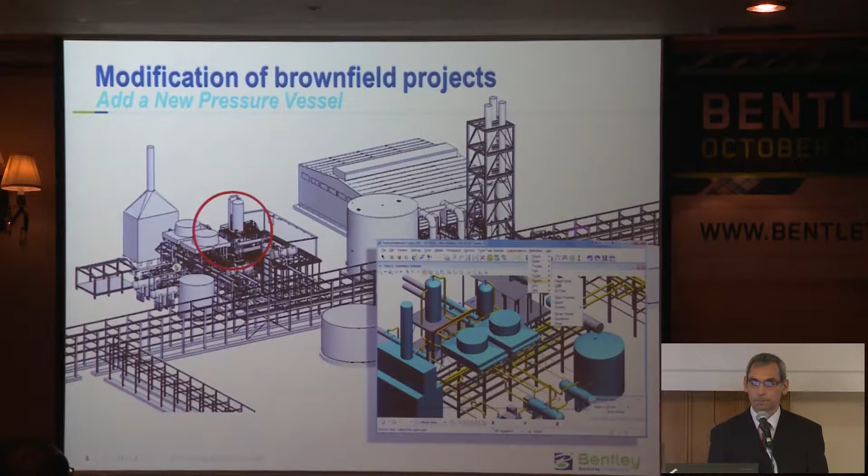So we're going to be considering this as a campus, a site that has many aspects.

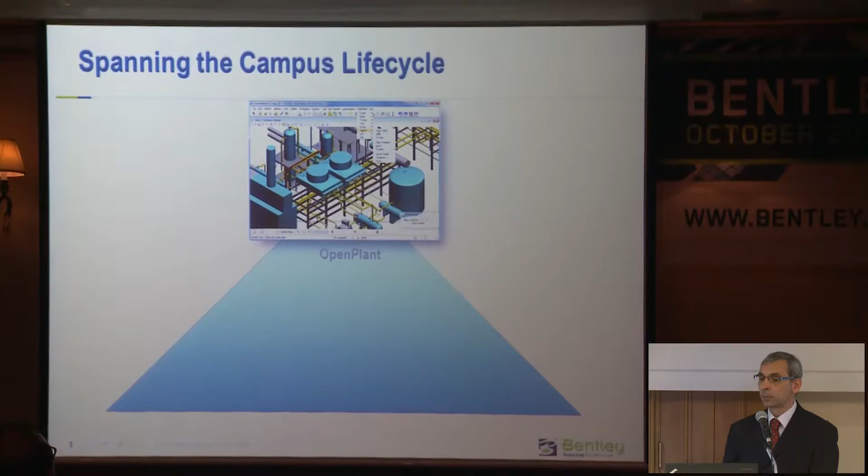So how do we do this today? Well, we look at this in stages. We can look at facility programming or planning the process. We look at the design, the analytics and the construction stages, and finally the operation stage.

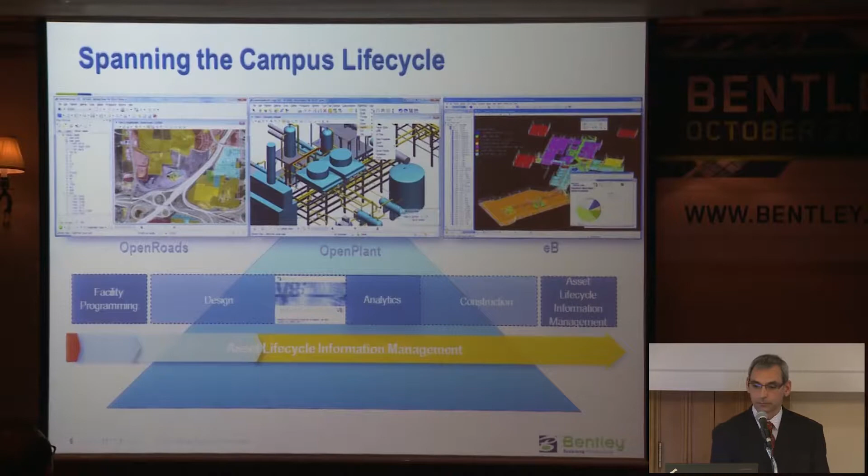So as a leader in providing software for infrastructure projects, we can provide tools to address those different parts of the project.

So a campus like this might use OpenPlant for the refinery.

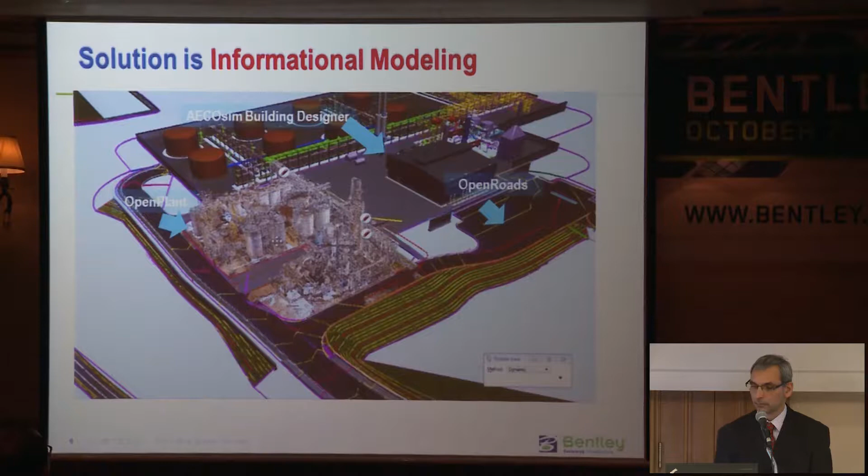So here we have a great hybrid model.

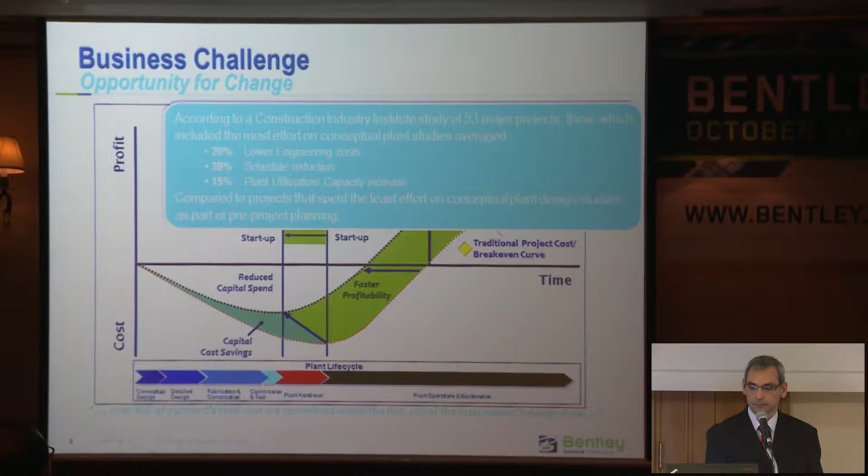So, for example, a typical EPC workflow, where you do your engineering followed by procurement followed by construction. The fact is, you have a problem in that you need to know early in the process what available materials and techniques to use.

As engineers, you're paid to investigate these options, but you don't have time. However, it has been reported that if you can do this, it will save you up to 20% on the design costs and 39% of their time.

More organizations are performing health checks on their projects and including the benefits of front loading in the engineering design.

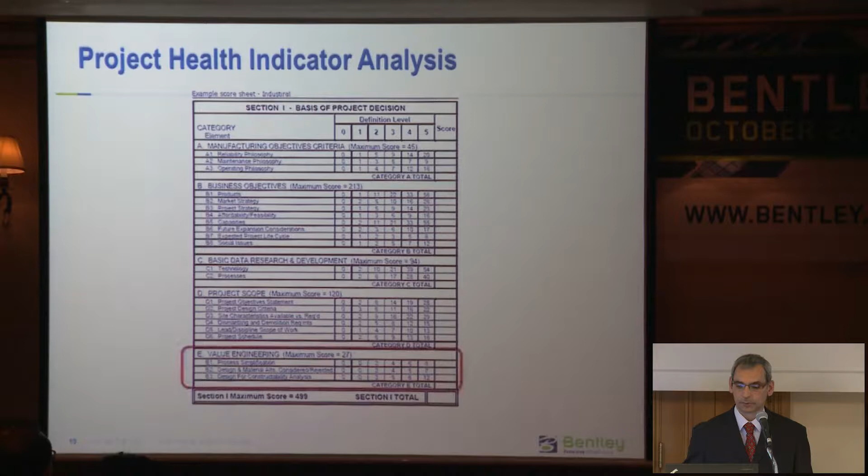This optioneering approach means that future costs can be reduced by performing substantive prototypes early in the project. It avoids abortive work later, when traditionally more cost-effective solutions could not be adopted.

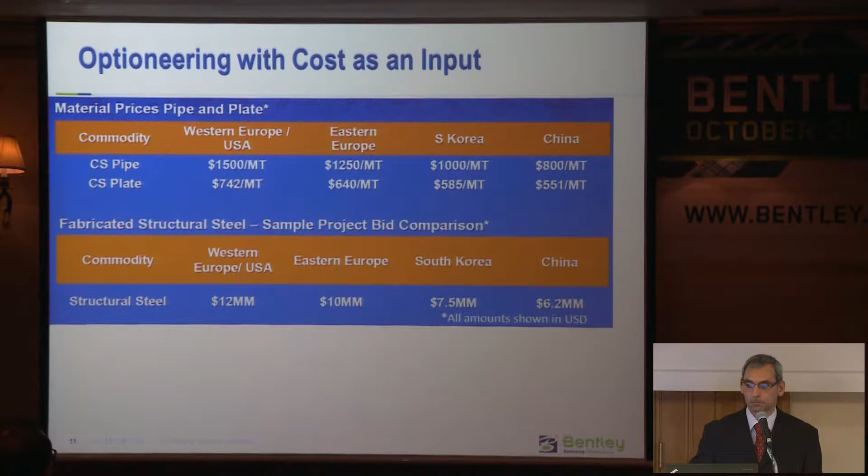So here, for example, the organization knows about the availability of steel. Using this information at the start of the project, designs can be given those constraints and proceed to fabrication and construction quicker.

Basically, there is no abortive work due to designs and materials which are not available for the project. So here is an example, and I'll just see if I can get this.

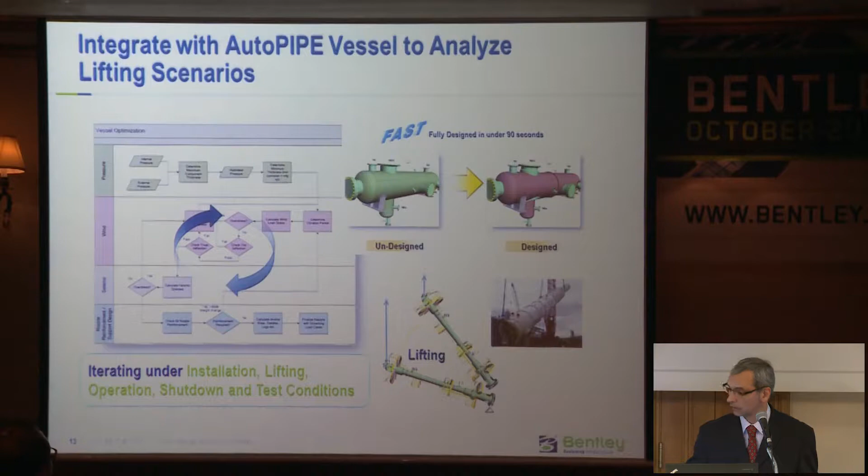Oh, here we go. So this is an example of where a vessel needs to be replaced in a heavily congested site.

Here we go. Thank you.

So we're going to replace a vessel in a heavily congested site.

First, we need to understand the site as it exists in reality.

And here, a point cloud model allows us to work with facts.

What exists on site, rather than any assumptions.

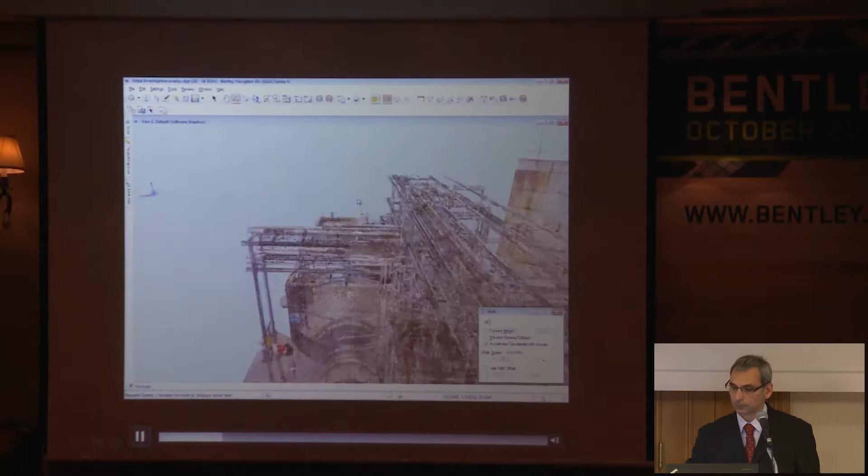We can bring this into Bentley Navigator and mark up drawings to convey the specifics of the job.

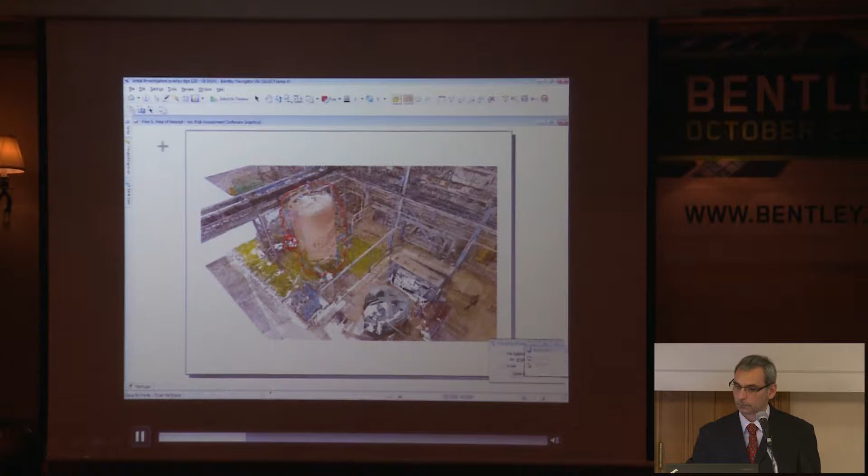We can create 3D PDFs to describe the requirement.

So we can see what needs to be done and also what might be affected.

The question is though, can it be done?

And also what else might be impacted?

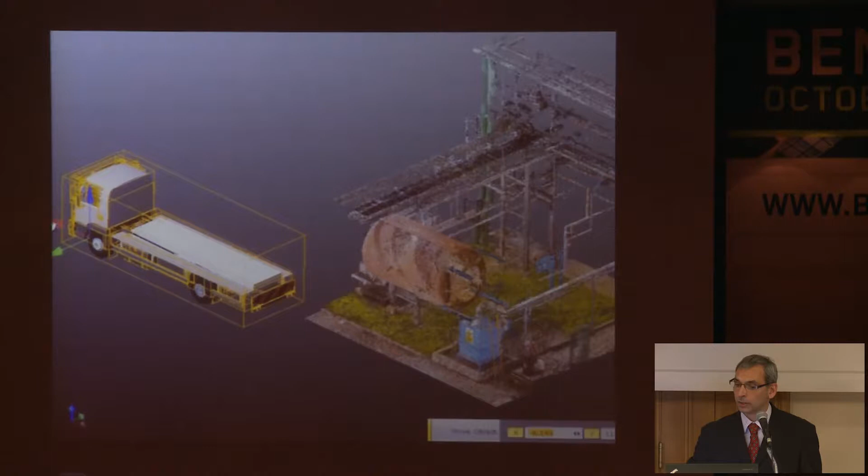With Pointools, we can pick the equipment that needs to be removed.

And we can check to see that the removal is possible within the confines of the site.

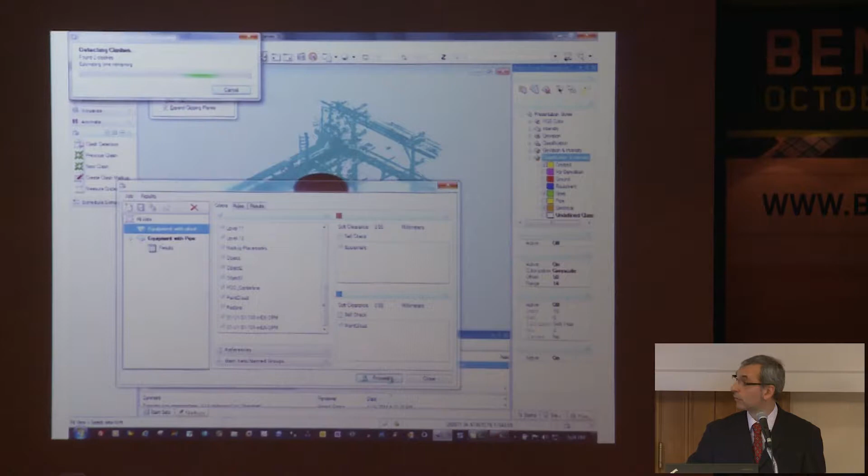We can also confirm the effects of loading on the flatbed.

So here we can also use clash detection.

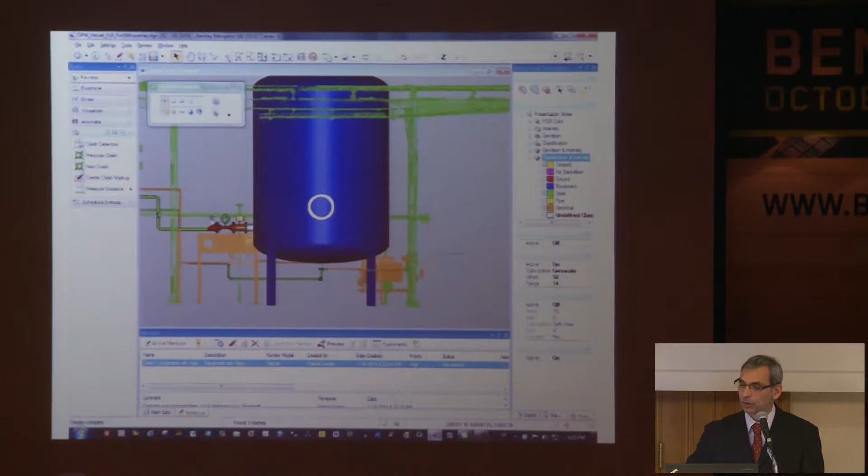And with clash detection, there is an impact on the electrical panel.

So we can get that moved early before holding up an expensive crane while it is dismantled and relocated.

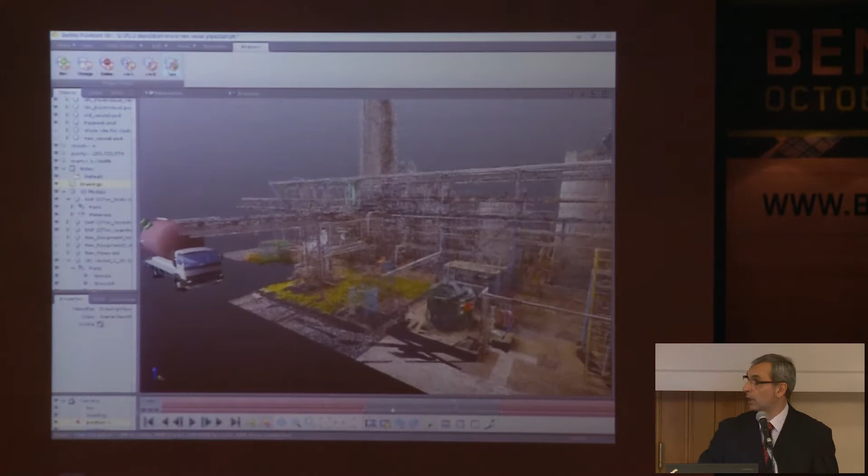We can also look to see about returning the new vessel onto the site.

The clash detection is showing us that the nozzle is impacting on an overhead gantry.

By simply realigning the vessel, the obstruction is avoided.

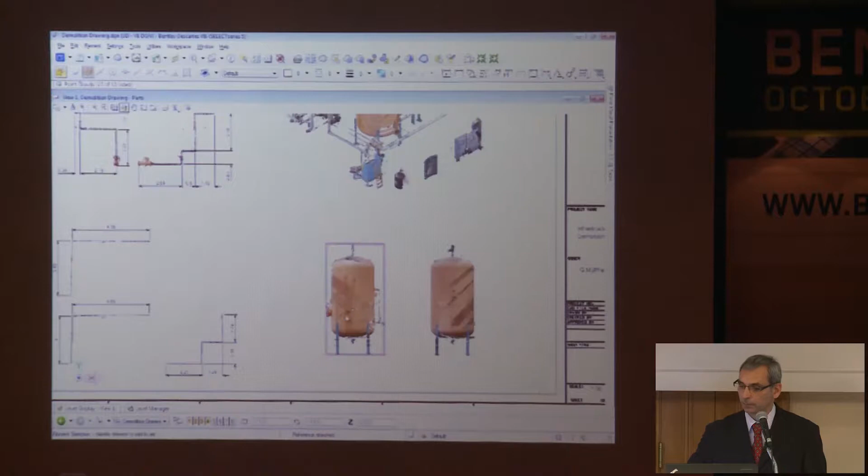And we avoid that nozzle clash.

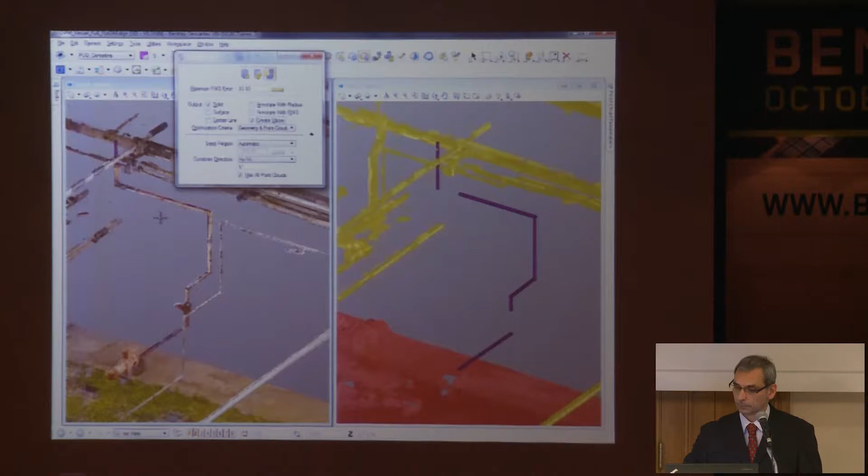We can also create our demolition drawings using Descartes directly from the point cloud data, including the pipe runs.

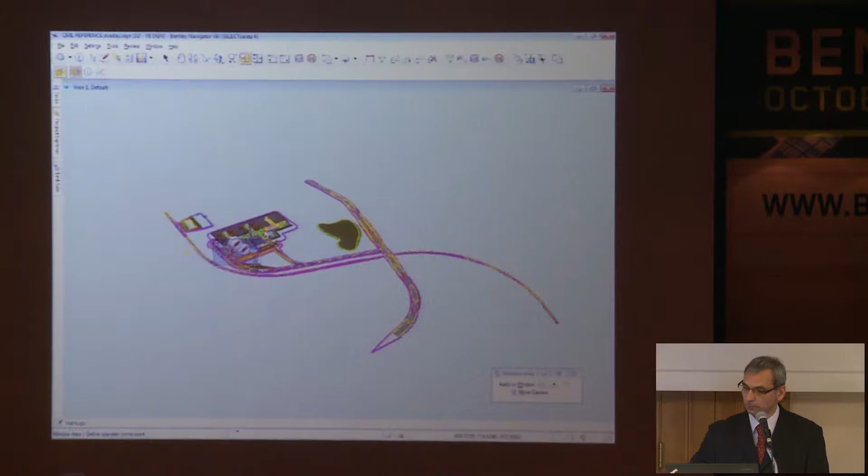So once cleared, the replacement vessel, the pipes and equipment can be produced using Navigator.

And all the model data is available directly to whoever needs it in the team.

Another concern is when installing equipment on site, the effects of the lifting process introduces stresses.

These stresses are in directions and locations not normally experienced in the final installation.

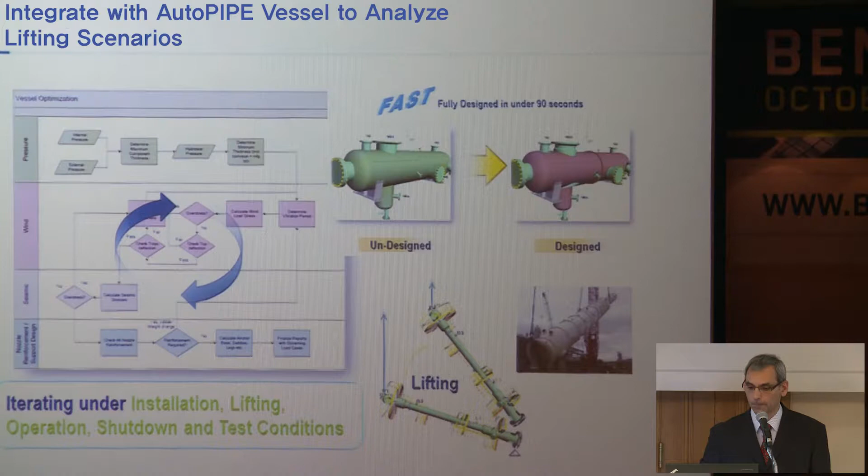However, this is critical to the installation process, and now that can be accounted for with AutoPIPE Vessel.

So we are seeing the benefits of front-loading the design. Here's another example. Without being able to check the feasibility of projects early, the most efficient solutions can easily be missed.

So PlantWise allows you to do conceptual layouts very rapidly with different options, taking minutes, not days, through pipe routing optimization.

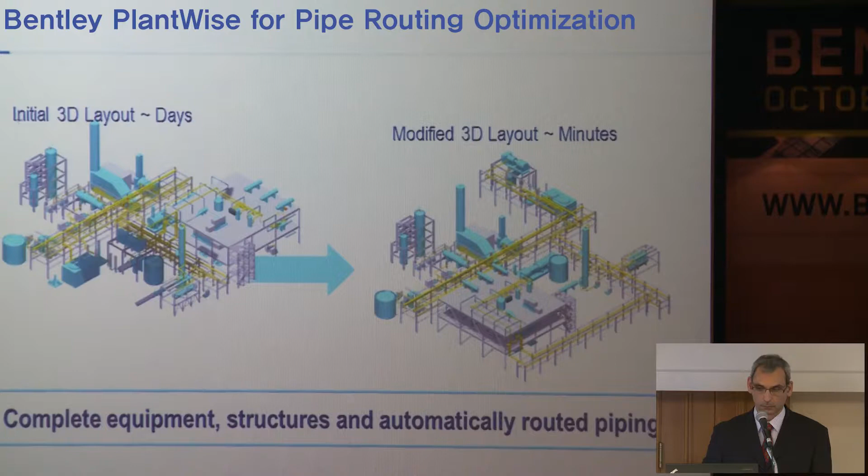As you can see, this is a base case with associated bill of materials focusing on the piping and components.

Very quickly, we can investigate alternative solutions. Here is design option 1 with its associated bill of materials. As you can see, the variance from the base case shows there is 300 meters less piping and 140 less elbows.

We look at design option 2 with its associated bill of materials. This time we have again 300 meters less piping and 169 less elbows.

With optioneering, it is now possible to value different designs.

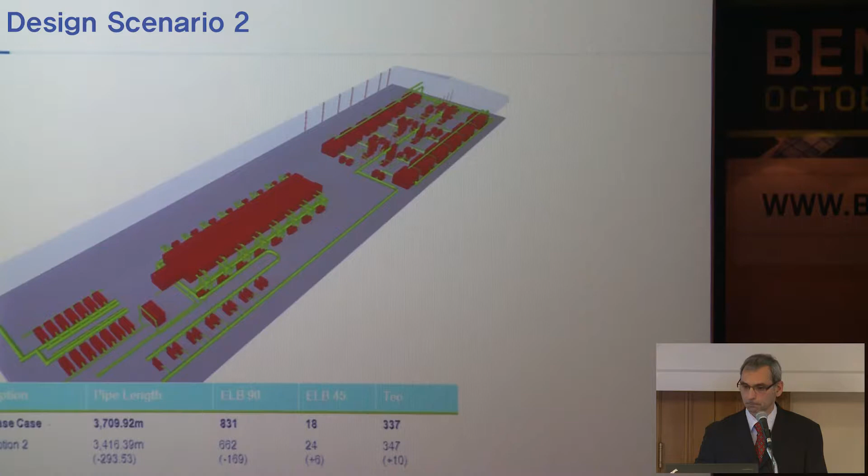And finally, here is design option 3, again with its associated bill of materials. In this case, there is 250 meters more pipe and 52 less elbows.

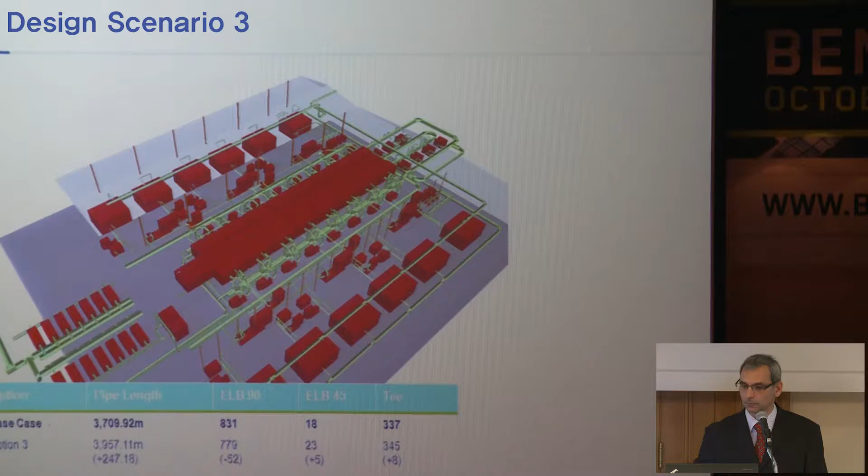With prototyping tools, optioneering gives you the freedom to explore options and make decisions early in the project based on facts. This means you end up with reduced redundant work later on in the project.

So what do we call this type of modeling? You're already familiar with the conceptual and parametric modeling methods. This is the third way that we call computational modeling.

Conceptual or sketch modeling is about quick creation of dumb geometry. The emphasis is on simplified modeling tools that facilitate ideation.

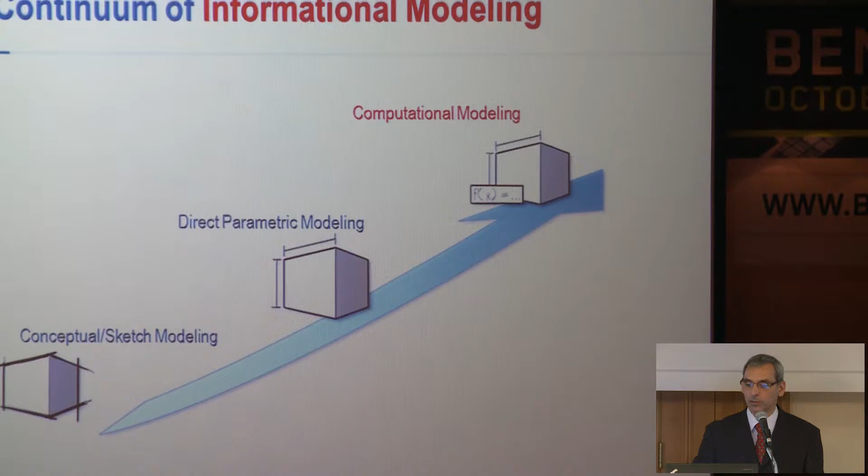Direct parametric modeling is in a more accessible environment, similar to sketch modeling. Whereas computational modeling, such as with GenerativeComponents, allows far more informative results.

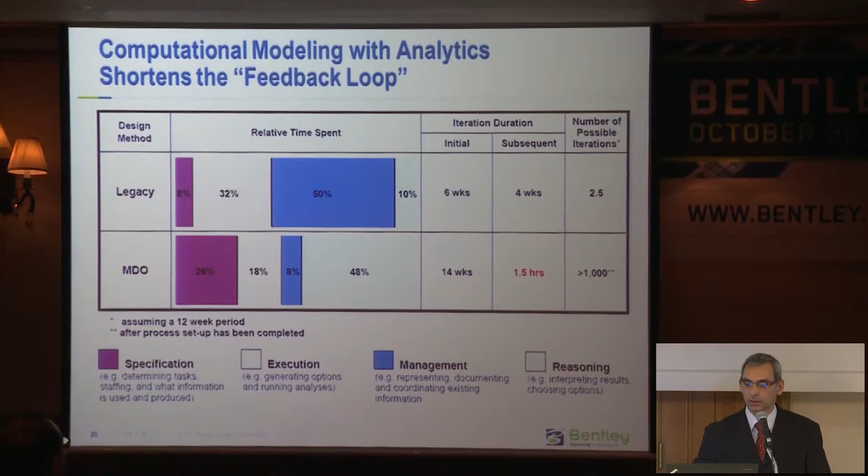A further benefit, which is often not considered but is all too common, is analytics feedback.

Projects are always subject to change and iterations. These should always be expected, and by front loading, we get the added benefit of reducing time that typically results from a design iteration.

As the results from a design iteration, many of the unknowns will have been accounted for.

Some projects only have a few iterations, but the more iterations there are, the more often it's outside the control of the design team. So very quickly, the anticipated profitability will quickly disappear, which is good for nobody.

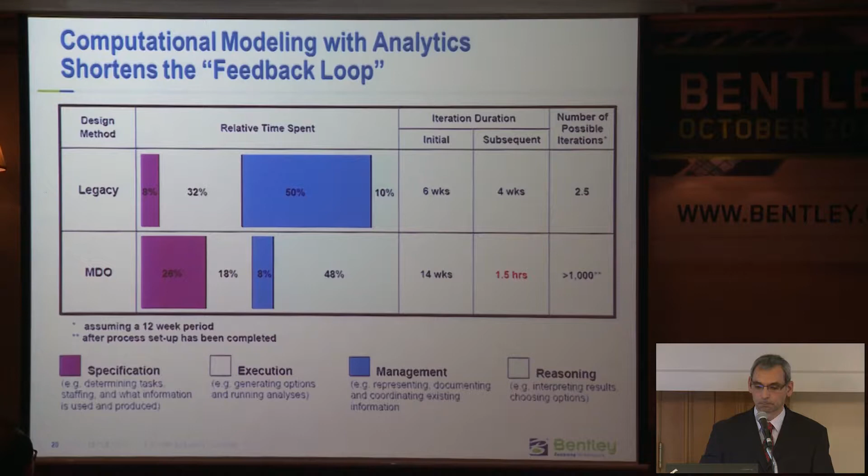So by now, I hope you agree that the theory and benefits of front loading and interoperability are clear. You as the designers, as well as your clients, will get a better, more fully investigated and complete project.

So let me show you how we can do that.

Firstly, interoperability is about working together. With Bentley, we do this using i-models. The key in ensuring optimum development process is teams working together, utilizing their own discipline-centric tools, but in an integrated central model.

Each discipline has their own i-model and design tools to address the specifics of that specific discipline. Each one can be analyzed to validate their own requirements, be it HVAC, electrical, structural, or whatever.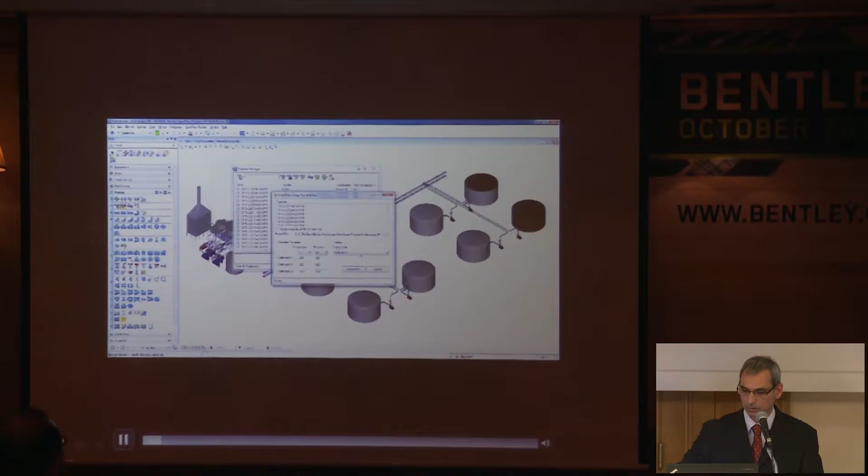So here we've got an example of a pipe engineer checking the performance of a number of pipe runs under their operational conditions.

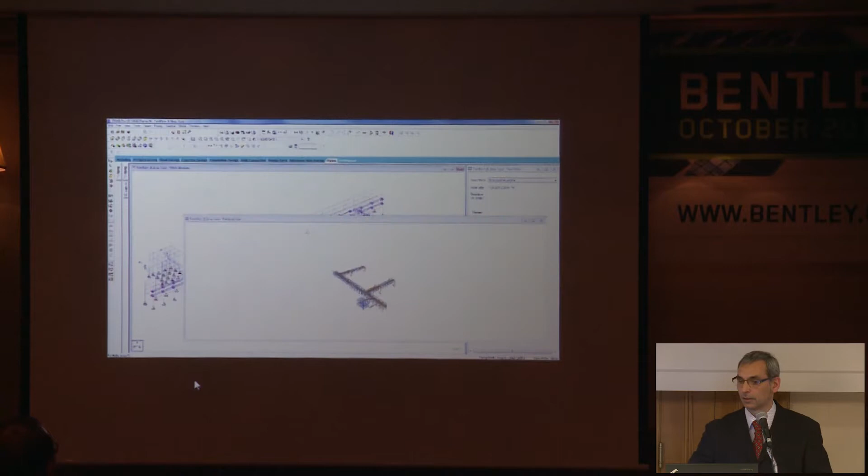Traditionally, this would be isolated and data transferred to the structural team.

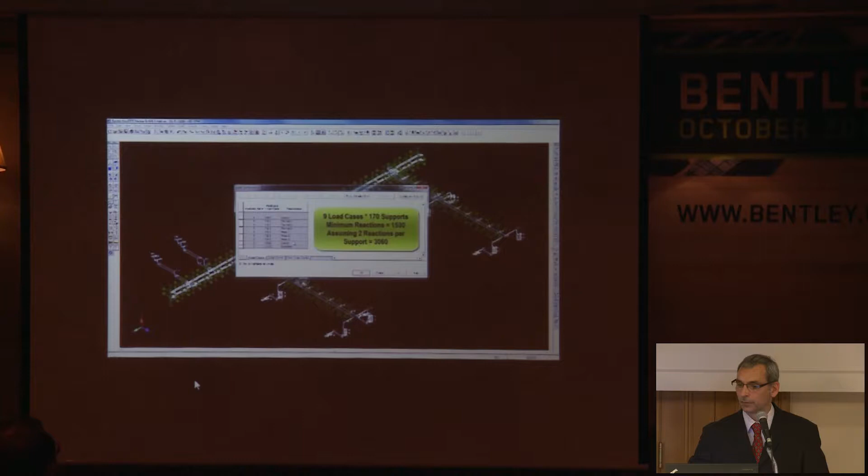But with the integrated approach using AutoPIPE and STAAD.Pro, the pipe loading can be transferred directly to the structural engineer.

And the structural information passed directly to the pipe engineer.

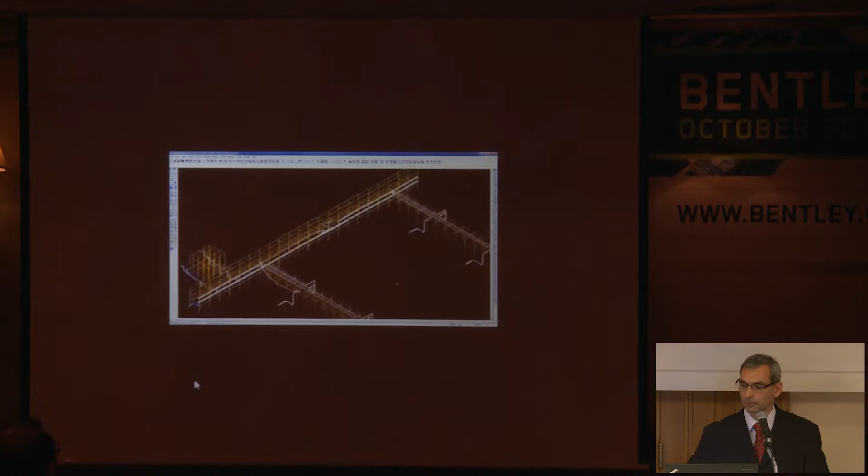Not only is this more accurate, but it can be done in a fraction of the time.

Productivity and time saving for both teams, and thus the project as a whole.

So let's again see optioneering in STAAD.Pro. As we saw earlier, this is the new understanding of the benefits.

As the tools that engineers have become ever more powerful, engineers have rightly looked to use that power to get a better understanding of the behavior of the projects they are constructing.

A simple stick model to represent a 500-meter high residential block is simply not sufficient.

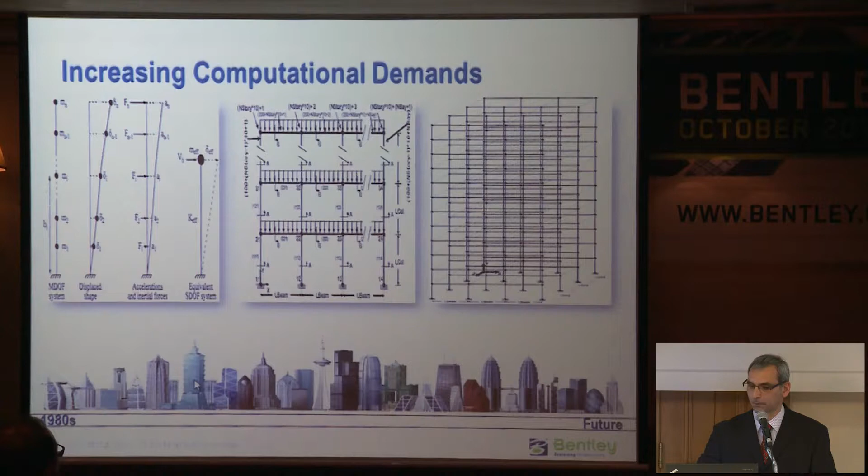So the tools that are available now to create these ever more elegant structures are increasingly being developed.

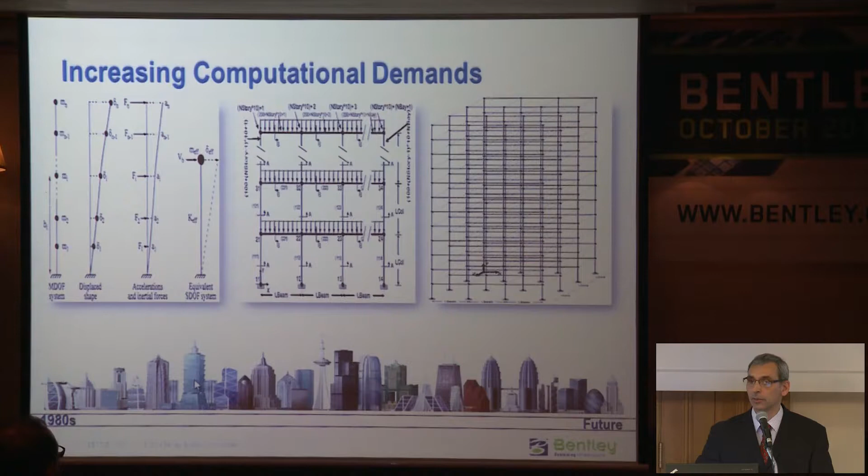So each can solve a given brief, but for the design team or client, how can they value the different solutions?

With such tools in the hands of architects and designers, we have some amazing buildings.

So this 180-meter high building in London called the 30 St Mary Axe building, known as the Gherkin.

It's been designed by Foster and Partners and Arups. Unfortunately not with STAAD.Pro, but if only they had, they would have been able to quickly answer some fundamental questions.

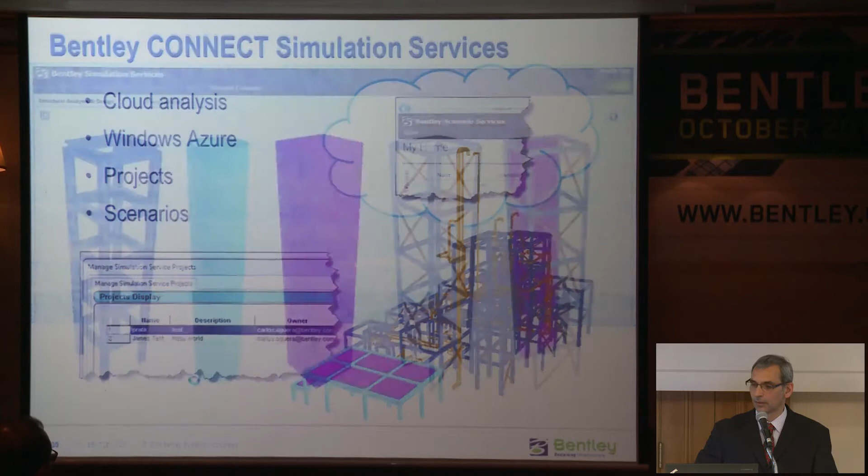As we saw this morning, this relatively simple example shows you clearly the benefits of optioneering and the cloud solutions in STAAD.Pro.

That was one example which demonstrated one benefit. I'm sure you're now thinking how this can be applied to your own situations.

You will get the speed from using the largest computers on the internet.

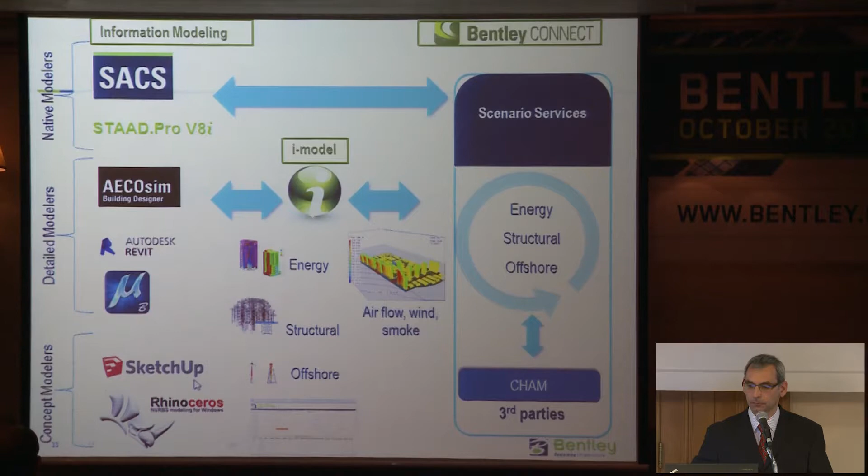If optioneering allows us to consider different costs of design earlier on the project, we again get to know where savings can be made by comparing various designs.

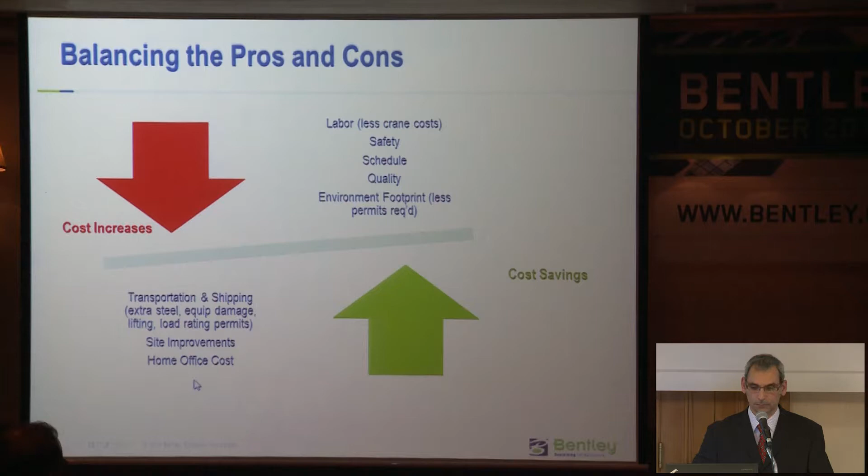And when evaluating this modularization option, we can see where the benefits and the financial benefits can come.

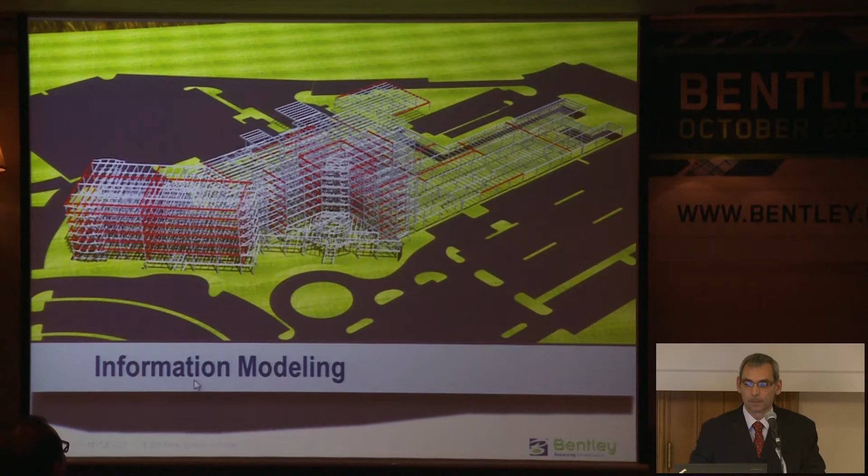But very quickly we all realized that it wasn't a thing so much as it was a process—an activity that's not isolated to the building industry.

The same philosophy applies to information modeling for the benefit of all infrastructure. We also consider that the processes behind BIM need to percolate through the entire life cycle of a structure.

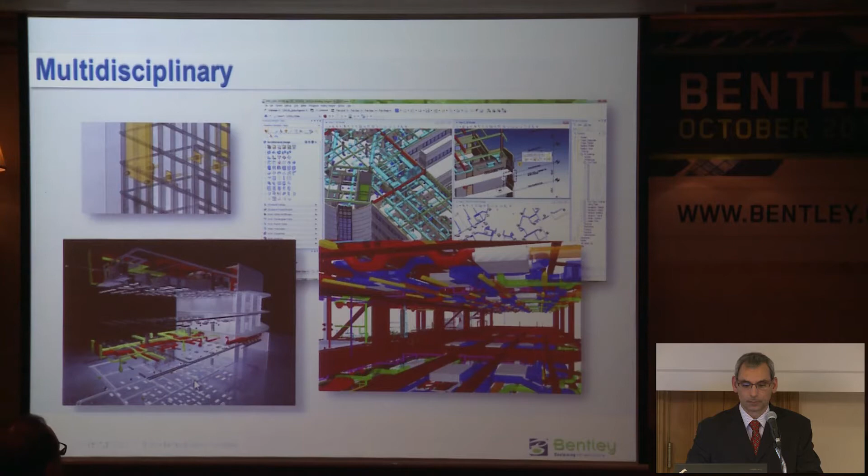The strength of information modeling is how well it can interoperate outside its immediate constraints. It means that other designers can benefit from one set of design decisions to make the best judgments in a completely unrelated field, bringing benefit to the overall project.

The solution we've created has to be broad enough to grow with the complexities of our designers' imagination.

Let me explain this interoperability problem. Surely it's okay to provide a series of point-to-point solutions, but what problems might arise from that approach?

Let's have a look at this example. If we consider one application passing its data to a second, for each application it wants to connect to, they have to develop a link. Every application that wants to do the same has their own links.

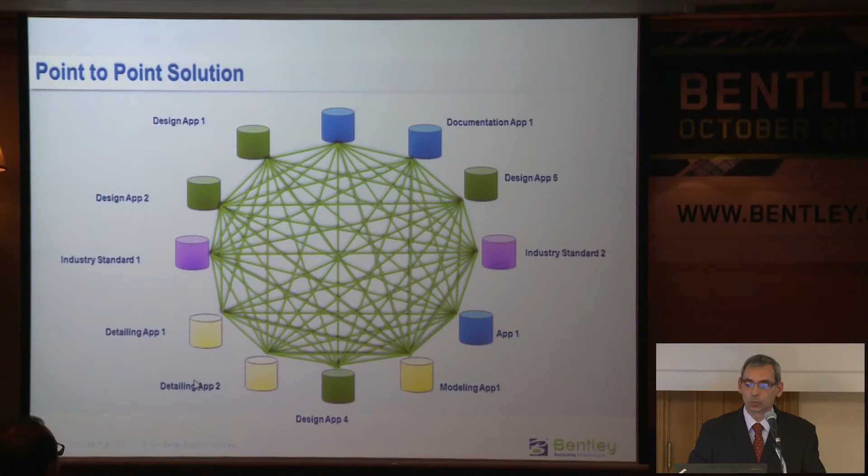So we end up with a spider's web. Working with a spider's web is not easy. Let's look at a problem for just one application.

We choose to send our data from application 1 to application 2. They then perform their design process and need to pass the data on further downstream to a second and third application. But we're in danger of losing data.

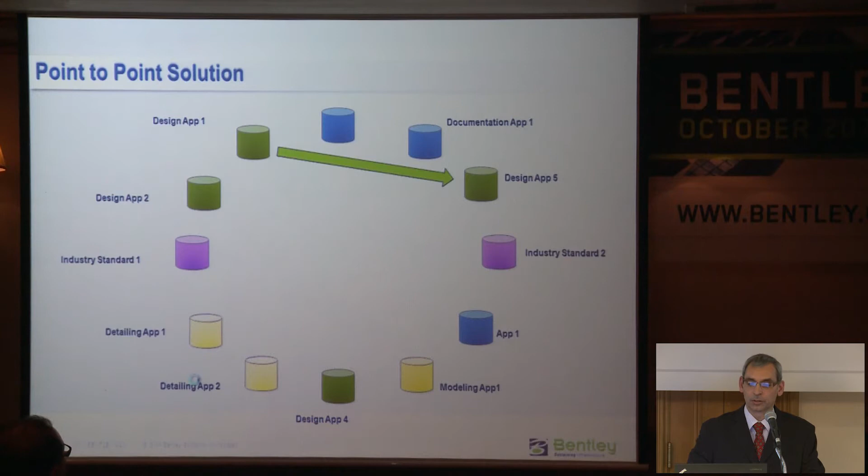Let me show you. We start with application 1, with 3 sets of data. We pass this to application 2, which unfortunately doesn't recognize section C. So it essentially filters out that information.

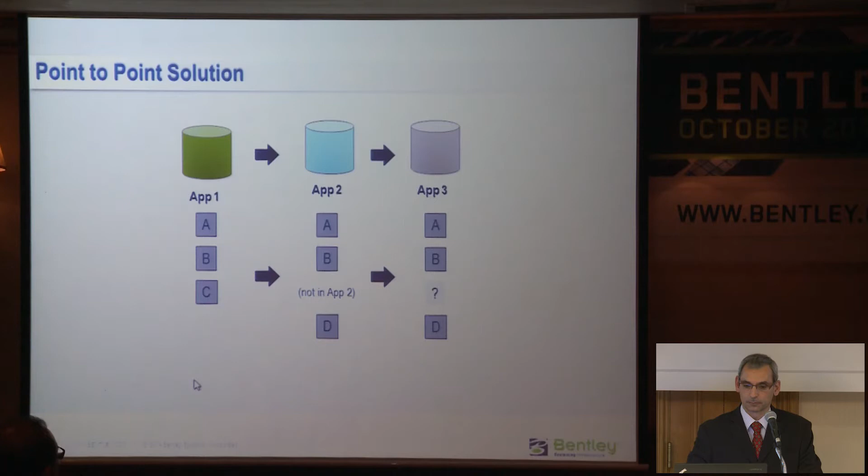We now need to pass this information to application 3, and application 3 has no idea that section C ever existed. So data is mapped twice and the data is degraded.

So let's go back to our idea of this spider's web. Rather than a spider's web, we want to provide a central repository. Everybody who participates signs to the consensus model.

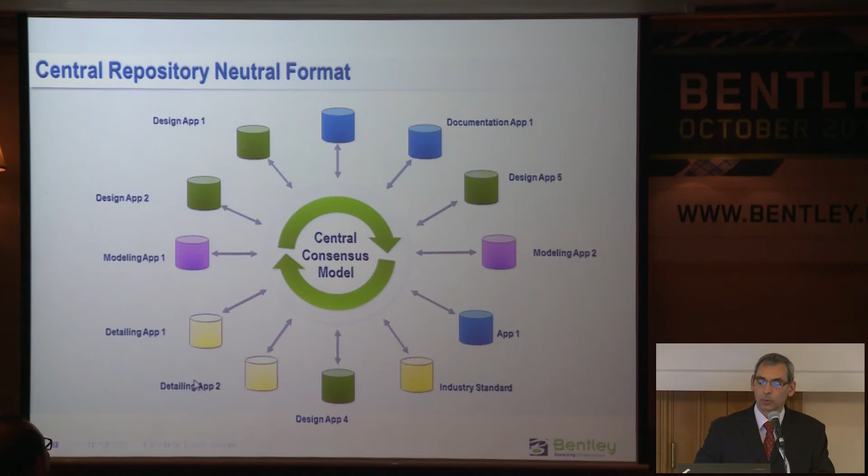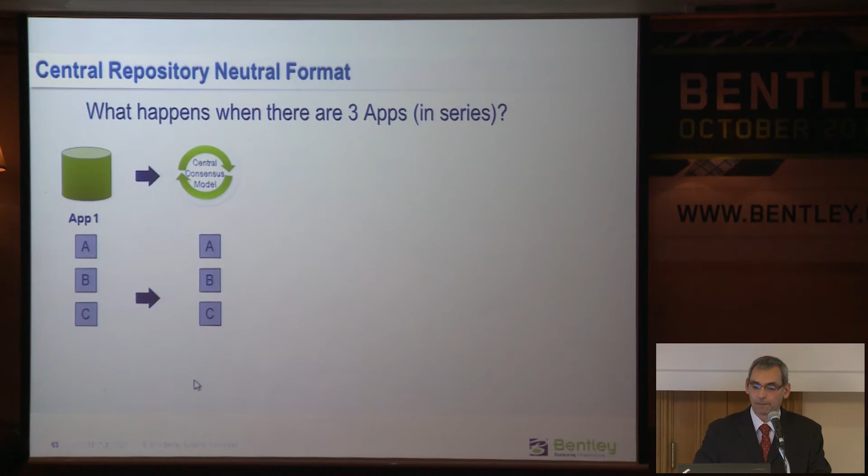So let's see what happens in that previous example. We start again with the same data, which is now added into our central repository. The next application that doesn't recognize part C does not consume part C, but consumes the information it does need.

In the previous scenario, application 2 didn't know part C existed. Now application 2 updates the repository with this additional information. Data C still exists and therefore can be passed to application 3. So the data is maintained and enhanced, not filtered.

We deliver this now with a free application where you can view the data, called the Structural Design Synchronizer. Not just visualizing the data, we get some major benefits from utilizing it.

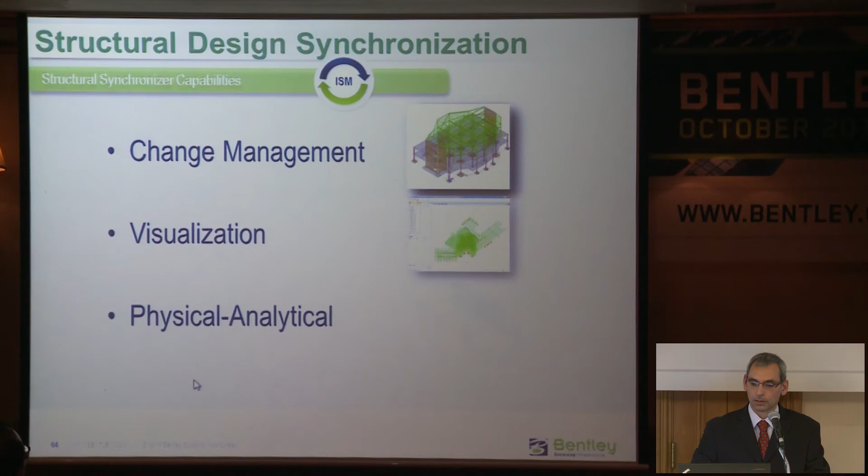And we also get the benefit of a physical to analytical conversion. This means that the analytical parts of your STAAD.Pro model are managed as the physical entities that exist in construction.

And you also get revision history, so the development process can be studied and if necessary easily rolled back to an earlier state.

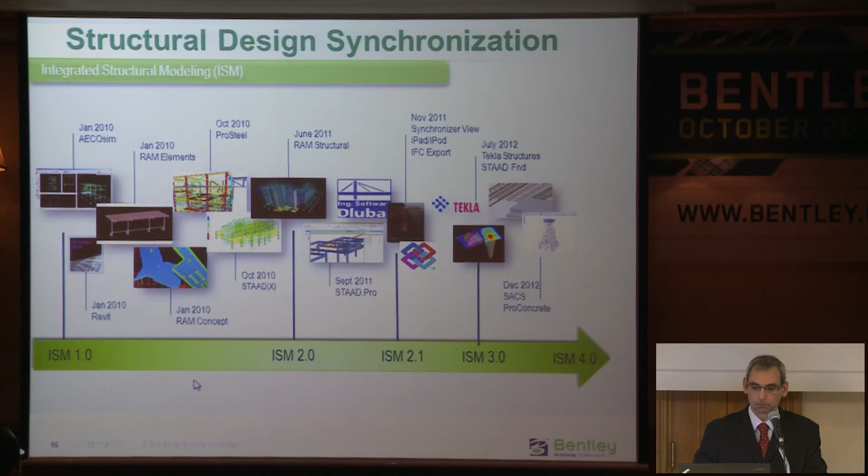ISM, as you can imagine, this level of development does not happen overnight. Over the years, we have seen some major leaps forward.

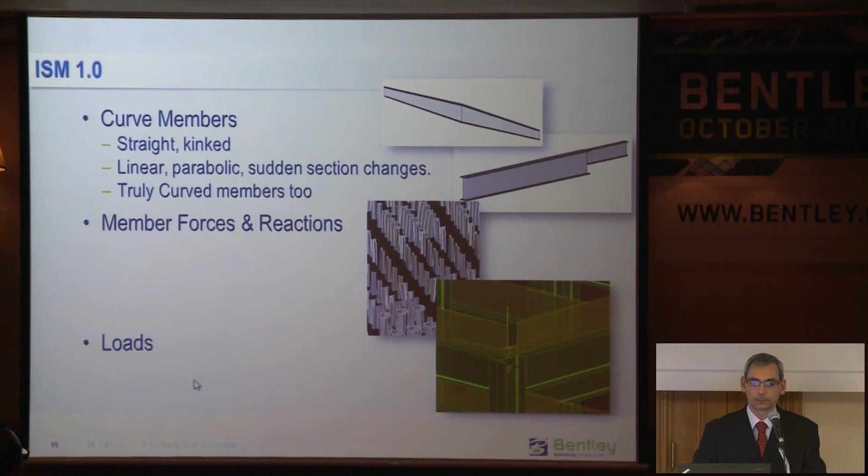Briefly, the original version 1, released in 2010, provided the framework. It provided the basic requirements of the plant industry. It managed the provisions of linear entities such as beams and columns, and the section properties derived from standard publications and definitions.

With version 2, the refinements of building models became the goal, adding the facilities of surfaces, floors, and walls along with their reinforcement.

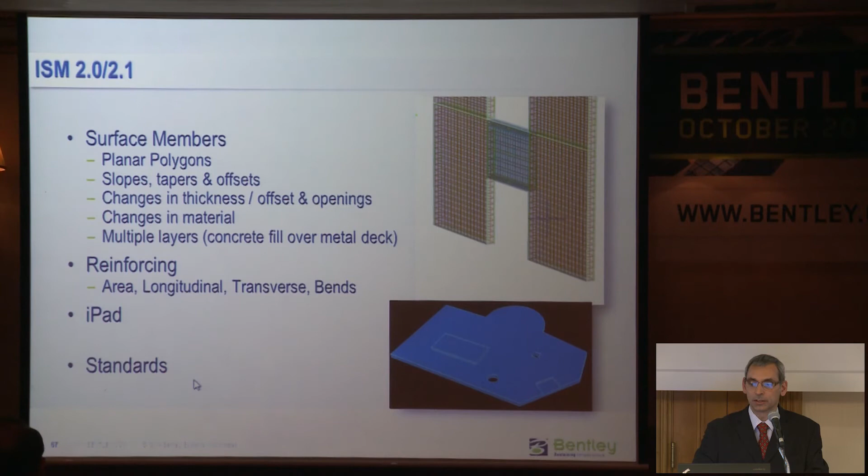We also address the notion of mobility and the fact that engineers are not nailed to the desk. With the iPad app, the ISM repository can be viewed live on site.

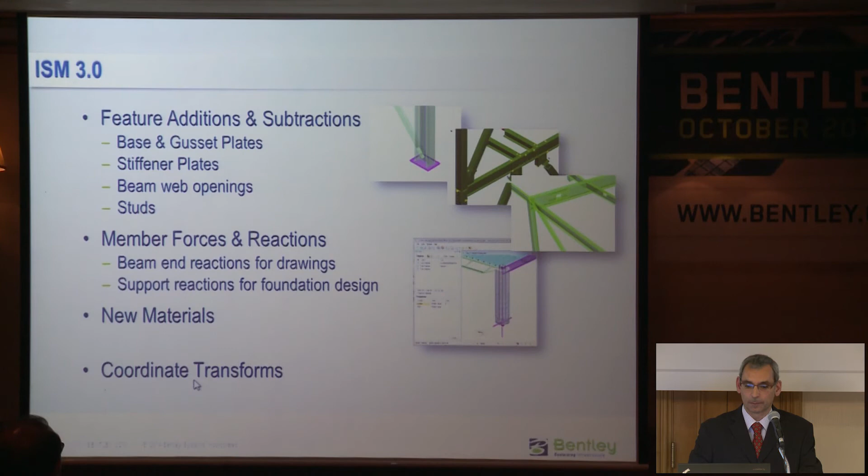In version 3, we built on the rich data provisions for the frame with detailed connections, analysis data for foundation designs, and support for a greater range of standard materials.

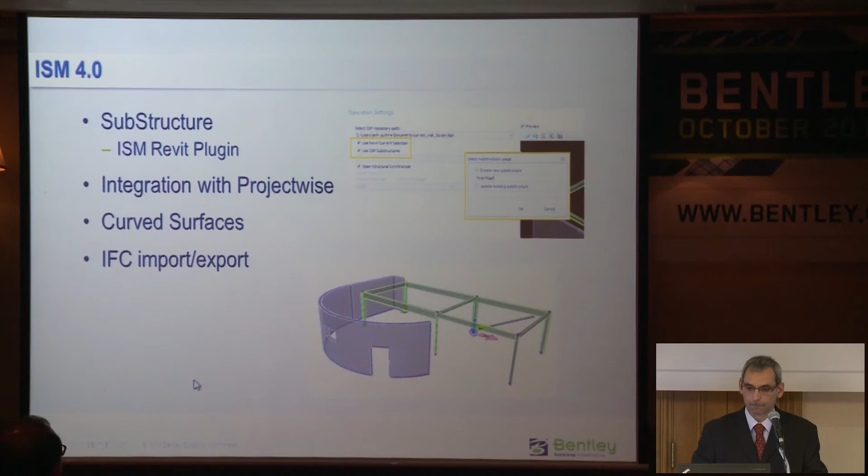And the latest edition, ISM 4, provides substructures and integration with ProjectWise.

The structural synchronizer is a free application from Bentley, as are a number of other applications which you can download directly from our iWare website.

So the capabilities on the iPad and the iPhone allow you to check for detail like never before, using the iPad and iPhone.

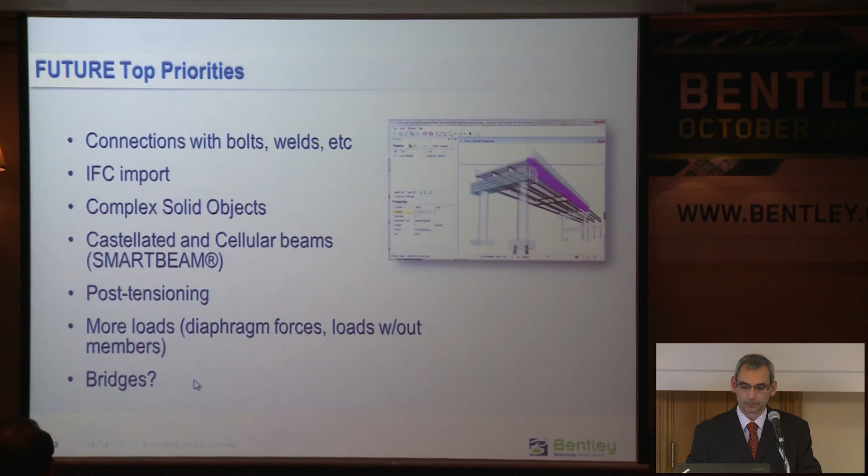As you can imagine, this technology has a solid foundation, but will continue to grow as we provide ever more capabilities.

So when we look at structural engineers, they're part of a team working with a range of applications for delivering value in its own right, but may produce similar data in multiple different and disconnected ways.

A software solution that is to provide a cohesive base for communication needs to understand the basic rules of the disparate applications they are to utilize, so interoperability and integration across these solutions will be strengthened.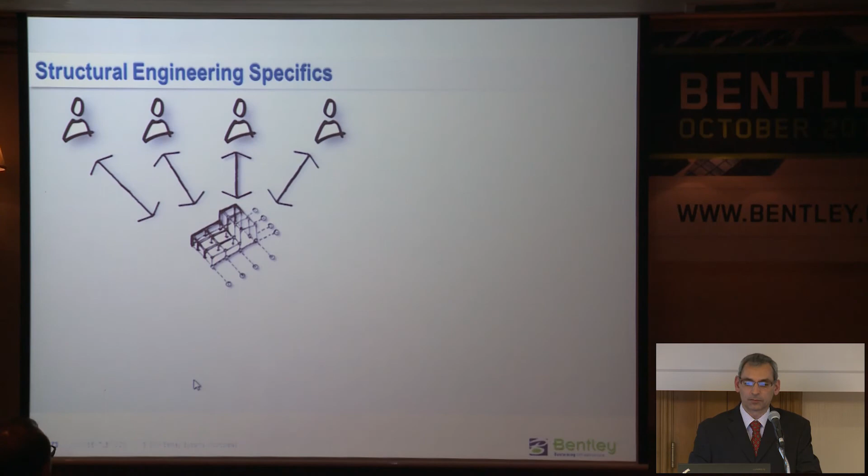Hence, we need both a degree of flexibility and rigidity in a good structural concept, and these need to develop together.

ISM has been developed along these lines. The roles of analysis and design applications, along with modeling and detailing software, have been packaged into a consensus schema.

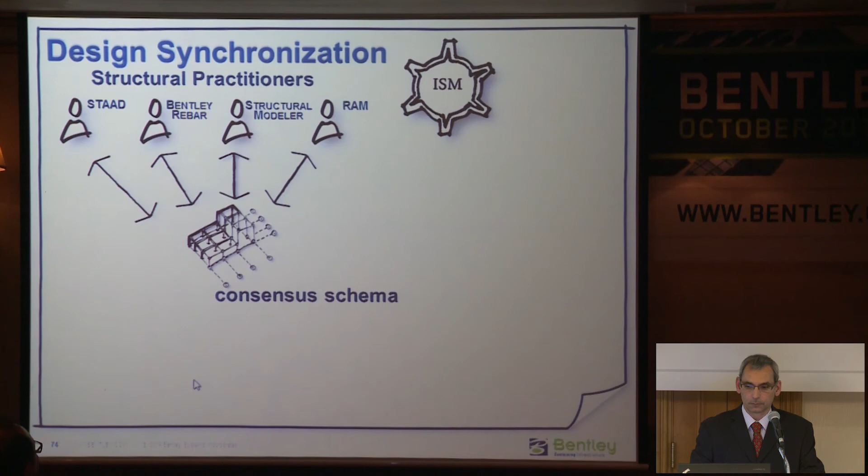So it allows ready transfer of data without defining how any application operates in its own unique world.

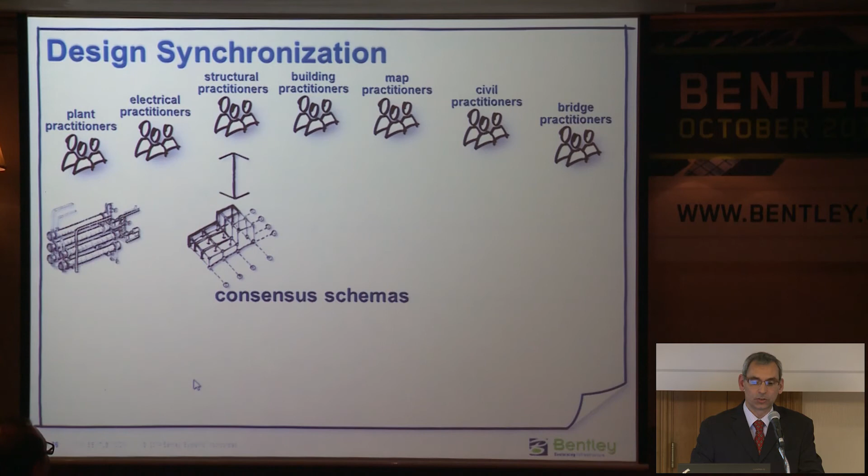And we can balance information consumers and providers, finding a single consensus schema. Each set of practitioners will be creators of their own specific schema - when they produce information, they become information creators within their own schema. Overall, everyone has their own schema, but they can consume data from another practitioner's schema, creating and utilizing data across different fields.

Here we can see clearly many practitioners will benefit from knowledge of the current arrangements of the structural frame, receiving information from this structural framework so that all project participants across different sectors can benefit from this work.

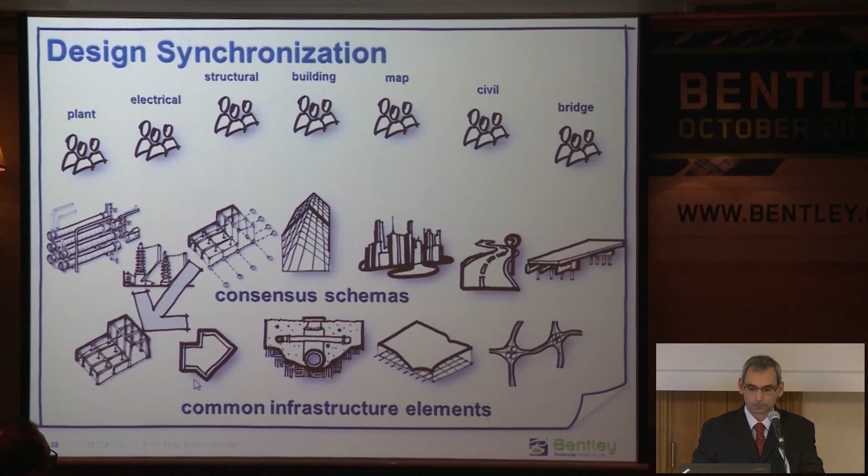The structural frame is a common infrastructure element created by the structural team from the structural consensus schema. Based on structural consensus, the structural team creates this common infrastructure element, but it can be consumed by design team members in other disciplines such as plant, building, or map groups.

Even when identifying groups of professionals as structural practitioners, we can still find multiple workflows in different industries that utilize different applications, with various examples of collaboration across different sectors to advance projects.

Here are a couple of quick illustrations. Let's consider a project in the plant industry as an example. The structural team might want to use the following applications.

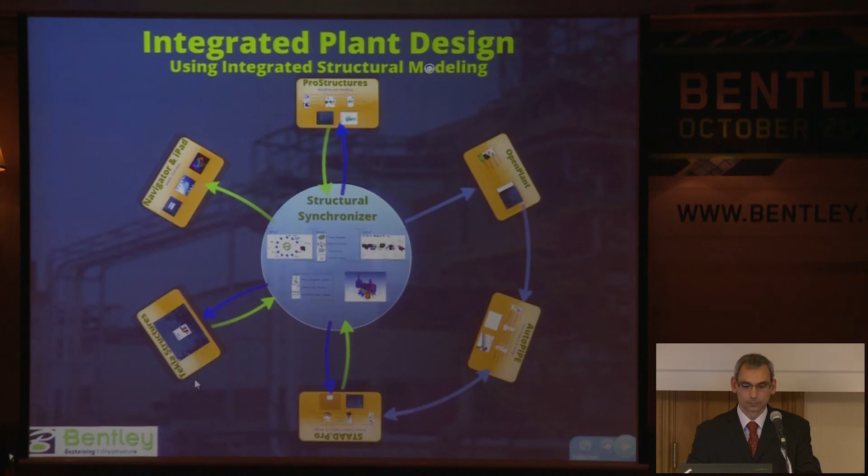A similar process might occur for the building workflow - a similar process can be applied there too. Different workflows, different applications, but both built around ISM as a common denominator.

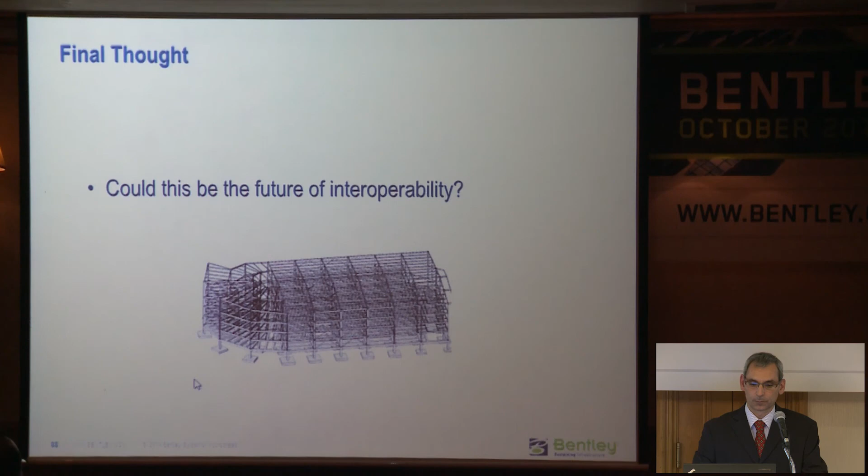So I'm just going to finish now with a final thought. Could this be the future of our interoperability - a truly universal translator?

Well, I've quickly run through BIM and optioneering available within the Bentley products and the structural portfolio. I hope this has proved a useful and informative presentation for you regarding optioneering and BIM in our structural products. Thank you, thank you.